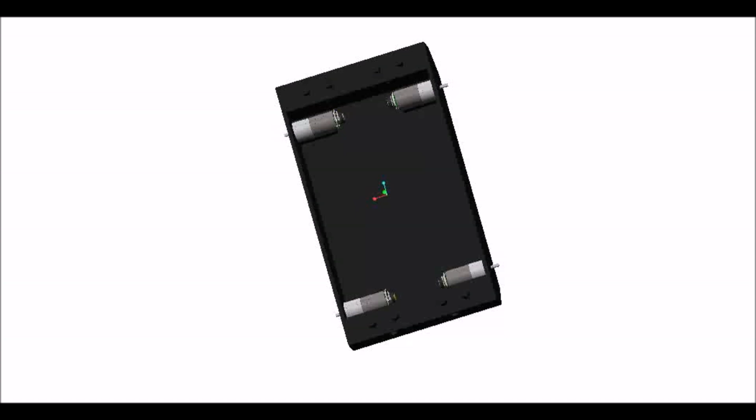Next, due to the inability of connecting the motors directly to the wheels, we had designed motor shaft extensions in such a way that the wheels can be connected. Next, the wheels are connected to the motors, and this is the complete wheel assembly.

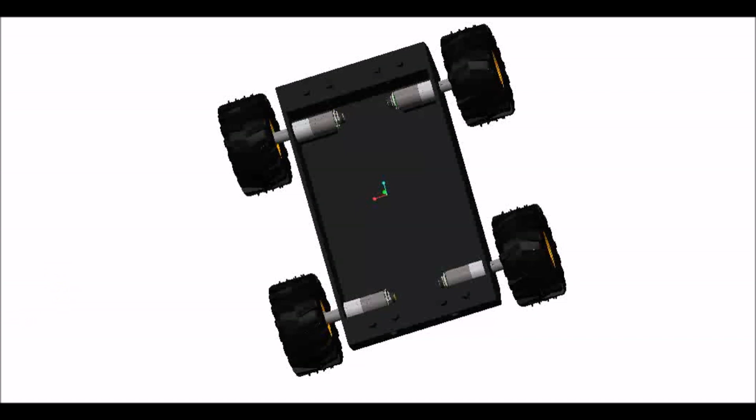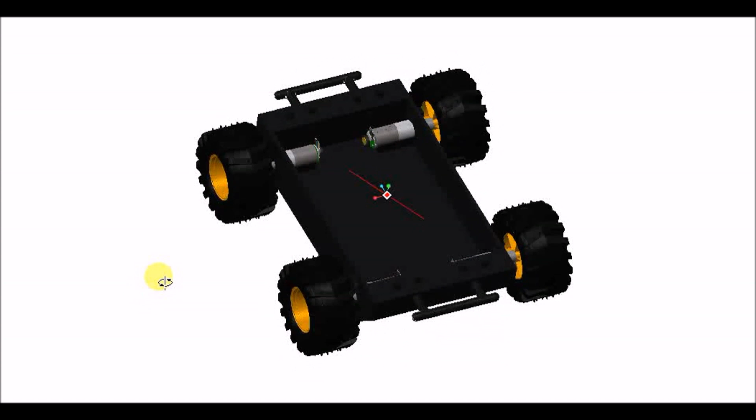Next are the handles, which are provided on either side of the robot for easy accessibility. And above each motor, there is a hole provided and there is an air vent to have continuous ventilation inside the base layer to avoid overheating of the motors.

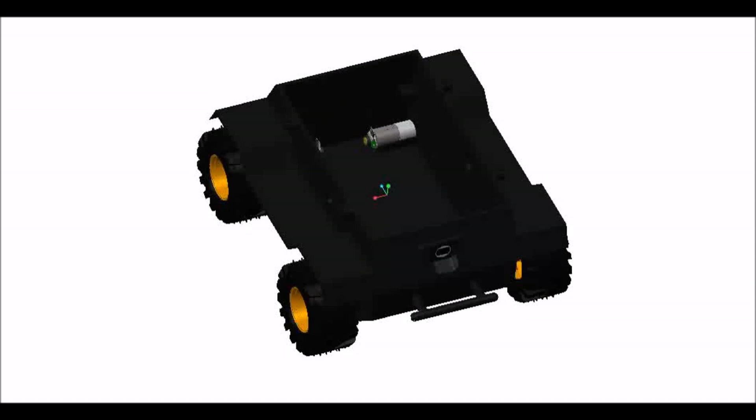Next are the four top components of the chassis, and the skirts are provided on either side above the wheels for aesthetic looks. The camera is housed inside the chassis on one side. The middle layer is there above the base layer, which houses other components.

The top layer is provided on the top in such a way that the lidar is housed such that only the rotating component of it is above the top layer and the rest of the lidar is inside. And this is the complete mechanical assembly.

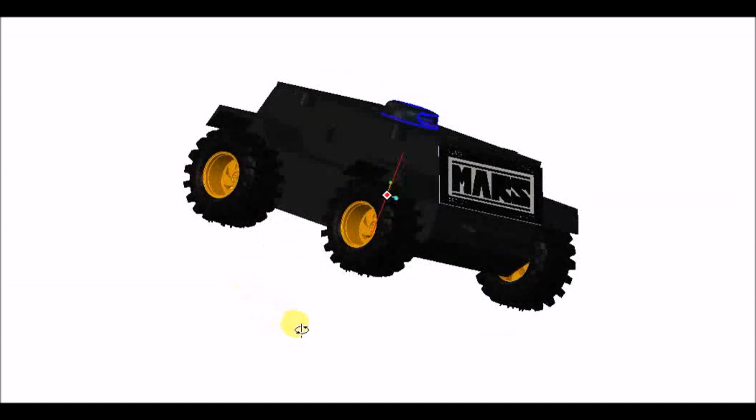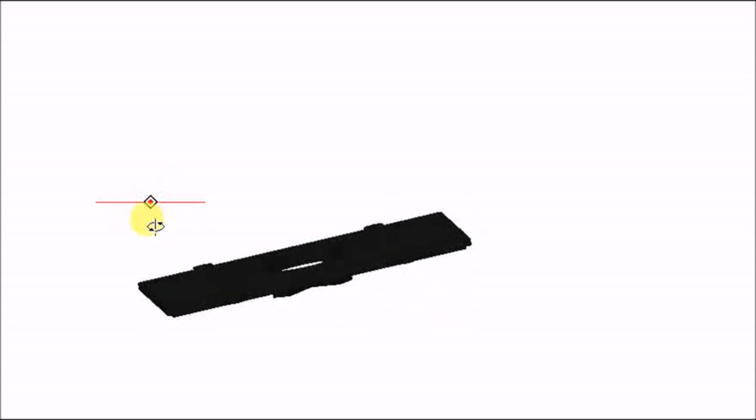Next, I will be explaining the top layer. Due to problems of printing the entire top layer in a single way, we had to divide the top layer into different components. So the top layer consists of three parts on top, a supporting layer at the bottom which is stuck, and a part which houses the lidar. And together, as you can see in the video, this is the complete assembly of the top layer.

Hello, I will be explaining object detection and tracking, which we have used in the project Mars. The AdaBoost algorithm was used to train the object. The object we have chosen was a red color bottle. The algorithm is independent of the lighting conditions.

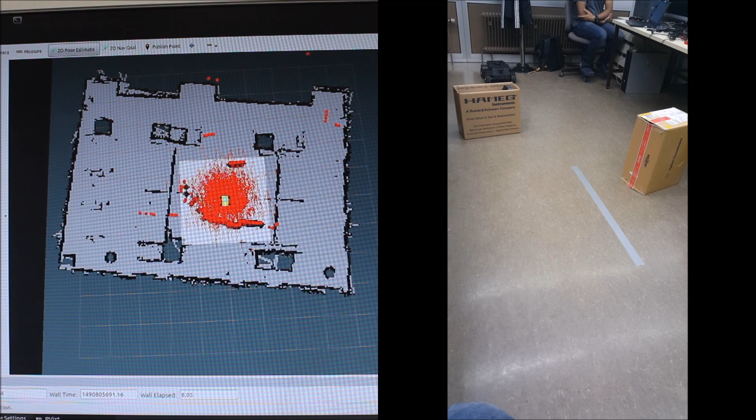And as one can see on the screen, on the left, there is the robot, and this robot is provided with the initial estimate, and this initial estimate is then used to navigate the robot appropriately in the environment. And these red arrows represent the probabilities as to where the robot can be.

And then we provide a final goal. This final goal is then used to navigate the robot successfully while avoiding obstacles and localizing itself while doing the path planning to achieve the final location.